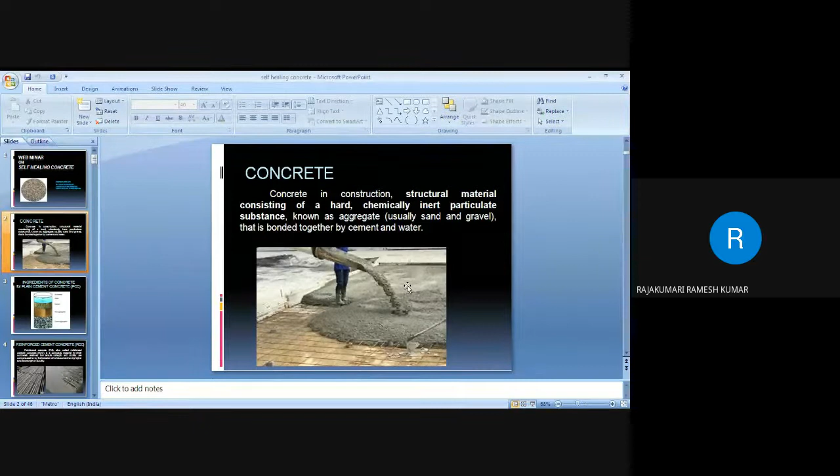Concrete is a hard structural material which is the mixture of aggregates and cement with water. When we say aggregate, the aggregates are sand and gravel. Usually the aggregates are fine aggregate and coarse aggregate. For fine aggregate, we use sand. For coarse aggregate, we add gravel, that is, what we locally call jalli. These ingredients are mixed together, then we get the concrete.

Each one of these ingredients has specific functions, and we need to know how they play in the concrete. First, the coarse aggregate. The coarse aggregate is nothing but the jalli, otherwise gravel. We call it coarse aggregate because the particles are more than 4.75 mm in size. If the particle size is less than 4.75 mm, it is not coarse aggregate; it will be fine aggregate.

Usually we use granite stones. The function of the coarse aggregate is giving the entire mass to the concrete. The entire mass is achieved by the coarse aggregate only. Next is fine aggregate. Fine aggregate is aggregate with particle sizes less than 4.75 mm. Usually we use sand. Sand is a very good fine aggregate material in concrete.

The function of the fine aggregate is to fill the gaps in between the coarse aggregate. If we place the coarse aggregate, there will be voids, holes in between the particles. In order to fill those gaps, we need some material finer than the coarse aggregate, so we use sand as a filler material. So the coarse aggregate is the base material giving the entire mass, and the fine aggregate fills the gaps in between.

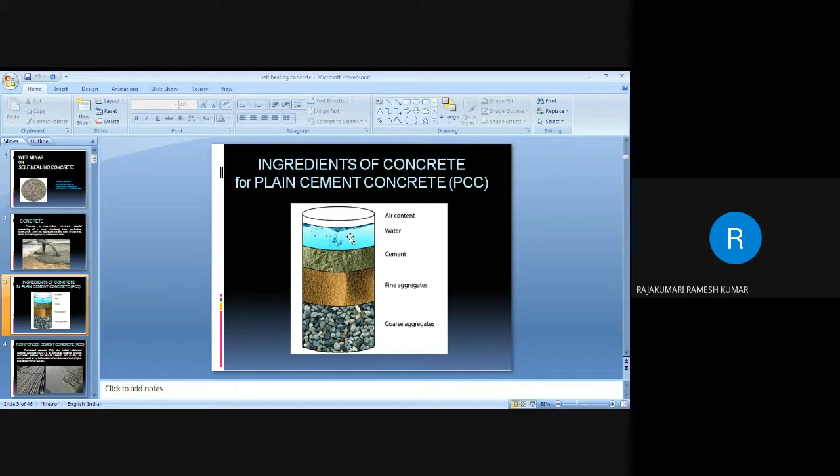So the concrete has very good compressive strength, but the tensile strength of the concrete is very less. But in a structure we need both strengths, compressive strength as well as tensile strength. So in order to increase the tensile strength of the concrete, we introduce steel into it, in the form of steel rods. When we introduce steel into the plain cement concrete, the concrete becomes reinforced cement concrete. We are giving reinforcement in the form of steel rods in order to increase the tensile strength.

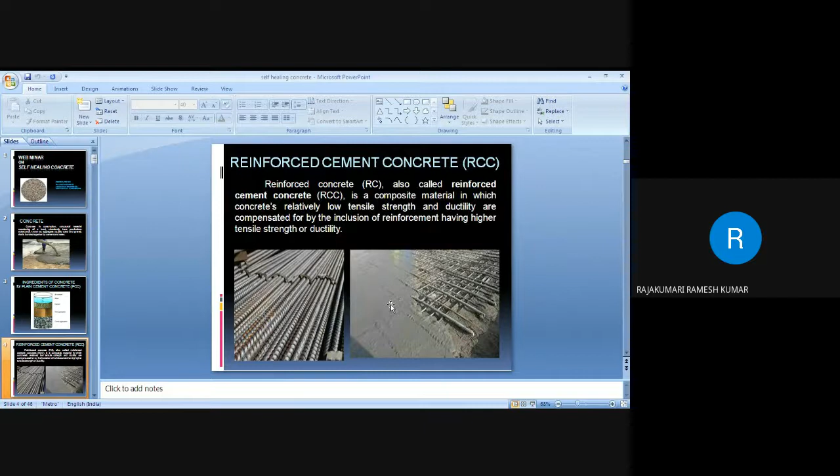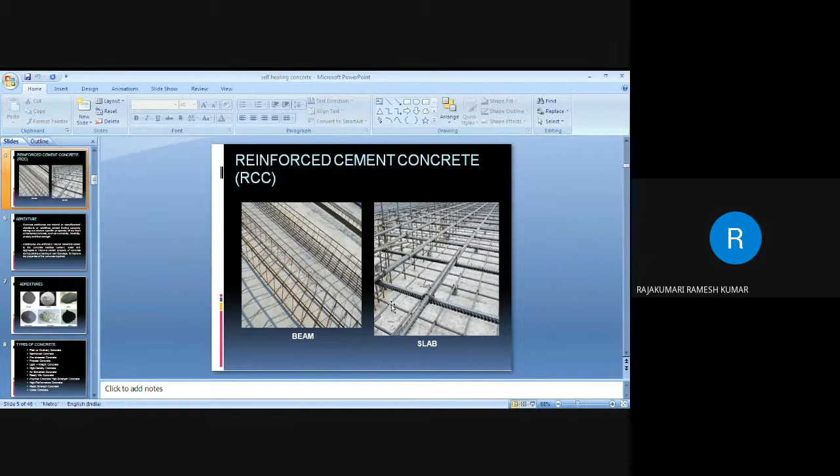So the concrete becomes reinforced cement concrete when it is added with steel rods. This is the steel reinforcement, this is the steel rod, and this is how the concrete is placed over the steel rods. Next, these are the reinforcement details, how the steel bars are bound before laying the concrete and placing it into the element. This is for a beam and this one is for a slab.

Next is the admixture. What is an admixture? We have seen the ingredients of concrete are aggregate, cement, and water. Other than these four major ingredients, if you are adding anything extra, maybe in liquid form or powder form, that is called an admixture. Admixture is a very important, unavoidable element, because in all circumstances we cannot apply either PCC or RCC, plain cement concrete or reinforced cement concrete. We need some special categories of concrete in some places.

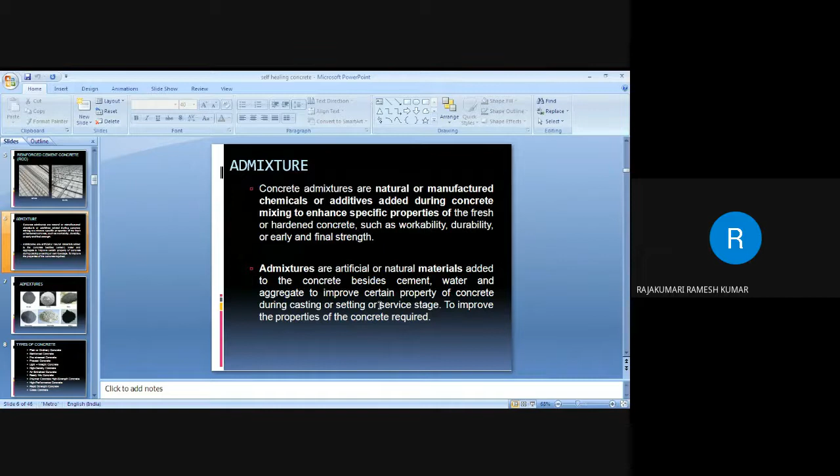We are building bridges over coastal areas, over the seas, over the oceans, or we are planning very high-rise buildings. In those places we cannot have normal strength. PCC and RCC give only normal strength; we cannot get more strength. So in those places we need some more materials to improve the properties, the character of concrete, so we add admixtures into the concrete. Admixtures are any material other than the major ingredients of concrete. Why do we add admixtures? In order to increase the durability of concrete, the lifetime of the concrete, and the strength of the concrete.

So these are some of the admixtures. These admixtures are in powder form. One is fly ash. Fly ash is nothing but the ash derived from coal; when we burn coal, we get fly ash. Next, GGBS, which is ground granulated blast furnace slag. This is derived from steel; the waste produced in the steel process is called GGBS. Next is RHA, which is nothing but rice husk ash. This is derived from the burning of rice husk, so that is called rice husk ash.

Next is silica fume, next metakaolin, and these are all certain types of admixtures, normally used admixtures. Next is types of concrete. As we have seen earlier, the ordinary concrete or plain concrete is the concrete which has only the major elements, that is cement, aggregate and water. Concrete which has these materials alone is called ordinary concrete.

When we introduce steel reinforcement into it, the concrete is called reinforced cement concrete. Like that, we have so many varieties of concrete. Those are pre-stressed concrete and precast concrete. Precast concrete is nothing but priorly built-up elements, like ready-made walls, ready-made beams, ready-made roofs; everything we can get ready-made.

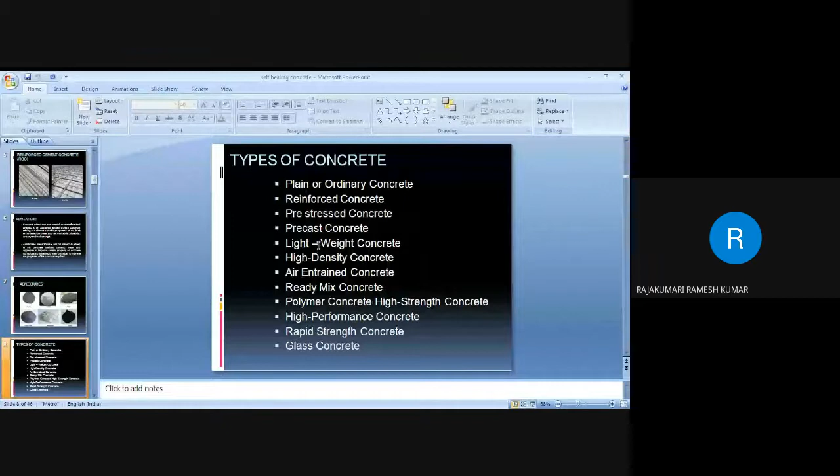Like that, there are various types of concrete. One of them is self-healing concrete. Before that, one of the major issues in concrete is cracks. What is a crack? A crack is nothing but an incomplete division of the concrete surface. It will divide the surface into two or more parts. That incomplete separation of a concrete or masonry surface is called a crack.

So what are the reasons for cracks? Cracks form due to various reasons, like shrinkage. Shrinkage is related to moisture; shrinkage cracks occur due to changes in moisture. If the concrete absorbs moisture, it will expand. If the moisture dries, it will shrink. Due to this, cracks form, and those are called shrinkage cracks.

Like that, due to temperature change: every concrete structure is in direct contact with the atmospheric temperature. When rain comes or hot climate is there, all the weather conditions are exposed on the concrete surface. If cracks form due to those changes in weather condition, that is due to temperature changes.

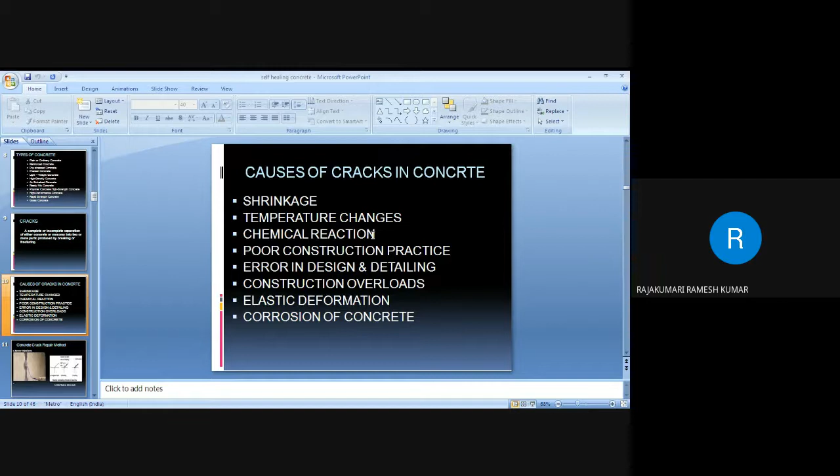Some of the older techniques to repair cracks are epoxy injections. Epoxy is a special resin-based material, and it is injected into the crack. This is one of the older methods. Another method is routing and sealing.

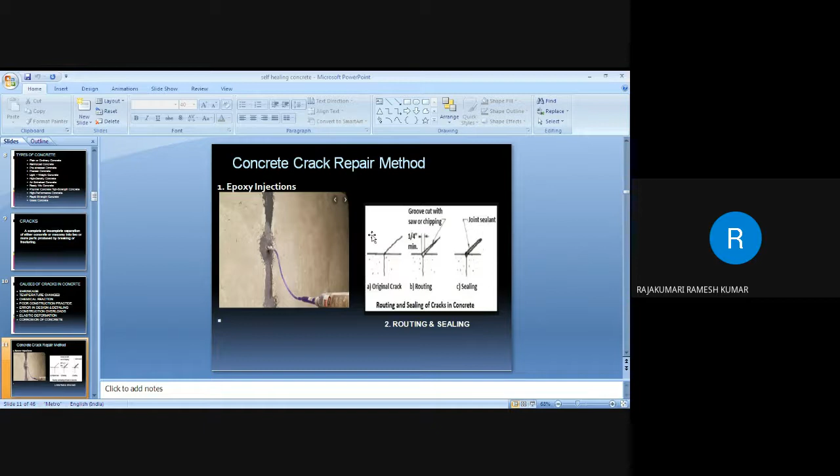In routing and sealing method, the V cut groove is cut along the crack, and it is sealed with fresh concrete. Okay, that is routing and sealing. Then another two methods are stitching and drilling method. In stitching method, the steel rods are inserted into the place where the cracks are formed, and finally it is sealed with the cement paste or any special paste.

Then drilling and plugging: here also small holes are drilled along the cracks where it is cracked. Through those holes, the grouting material, that concrete material, with dry or wet condition based on the environment, is injected through a grout. So this is called drilling and plugging method.

So these are the olden techniques, the existing techniques which are used to repair the cracks on the structures. But though we have varieties of methods to repair the cracks, these methods are very difficult in case of huge structures like bridges, dams, or high-rise buildings. In those places, doing the stitching method or drilling method or any epoxy injection method is very difficult.

So what researchers thought is, without following these techniques, how can we close the cracks, how can we seal the cracks? So they found a solution that is called self-healing concrete or bacterial concrete or biological concrete. All are the same. What is self-healing concrete? Here, the concrete itself heals the cracks. How is it possible?

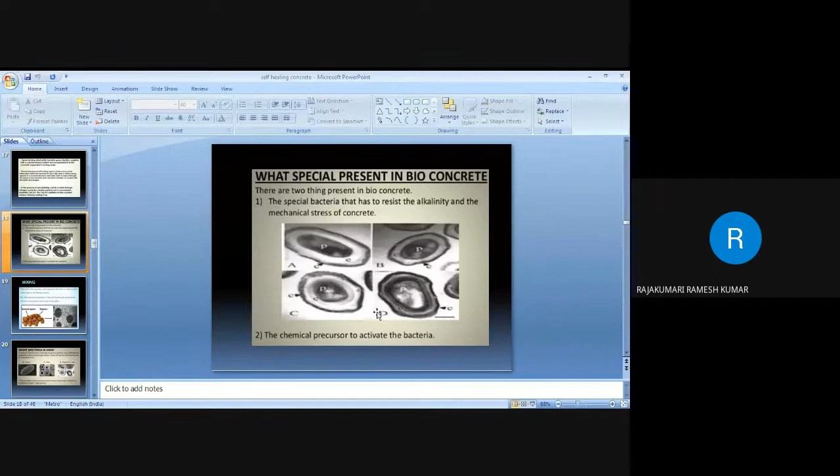Okay, so these ingredients are combined, and it is formed as pellets. And these pellets are going to be added to the concrete. Or sometimes it may be in the form of capsules. These bacteria and these nutrients are all filled in the capsule form.

Next, how this bacteria and the nutrients are mixed with the concrete. This is a very normal procedure, how the plain cement concrete is mixed. How we mix the plain cement concrete: first we add the fine and coarse aggregate, then the cement is added into that, and finally the water is mixed.

Here, after adding the aggregates and the cement, before adding the water, we add these capsules or these pellets. The pellets or capsules are nothing but the combination of bacteria as well as the nutrients. So these are added before adding the water, and finally we can add the water and get the self-healing concrete.

So while mixing this self-healing concrete, we should take care that the bacteria and cement are not directly mixed. Once the cement is mixed with the aggregates thoroughly, then only we should add the pellets. Otherwise the bacteria will start to react with the cement, so the entire step will collapse. So whenever we are preparing the self-healing concrete, the bacteria should not be mixed directly with the cement.

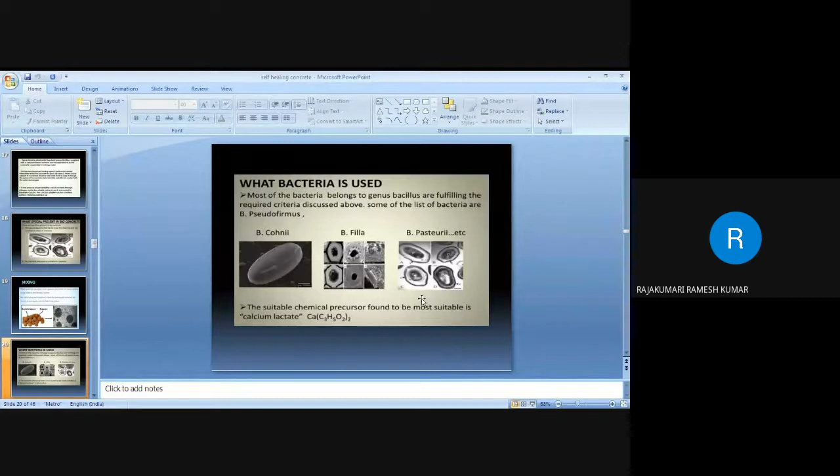So what kind of bacteria are used in self-healing concrete? Normally the bacteria used are the Bacillus type and the Pseudofirmus family of bacteria, in the form of Cohnii, Filla, and Pasteurii. These are the commonly used bacteria in self-healing concrete. And the chemical precursor, as I said earlier, the mineral or nutrient for the bacteria, is calcium lactate. These are the pictures of each bacteria, that is Cohnii and Pasteurii, then Species and Subtilis. These are the commonly used bacteria in self-healing concrete.

Next is the chemical reaction, how the bacteria is activated in the concrete. The activated precursor induces the bacteria to react with the nutrients, forming calcium carbonate, which is nothing but limestone. So this is the chemical reaction. CaC6H10O6 is the calcium lactate, which is the precursor. When it reacts with oxygen from the surrounding environment, both react and it is converted into calcium carbonate, that is CaCO3. This calcium carbonate is nothing but limestone.

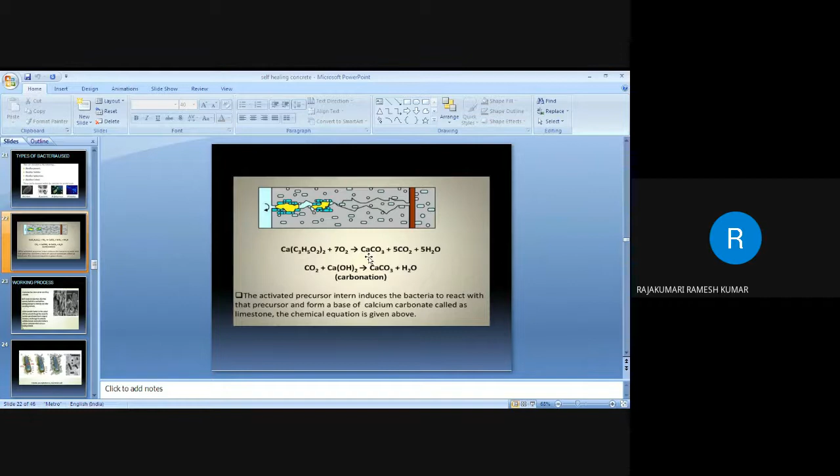So when the bacteria is activated with water or oxygen or carbon dioxide, it will produce calcium carbonate. When it is producing the calcium carbonate, it will be in liquid form. Once the calcium carbonate is formed, it will be solidified. When it is solidified, it will become limestone, it will dry, and it will close the surface.

So in this bioconcrete, if water comes in contact with the concrete through the cracks, then the bacteria get activated from the stage of dormancy. Until the water enters the concrete, the bacteria will be in the stage of dormancy without doing anything.

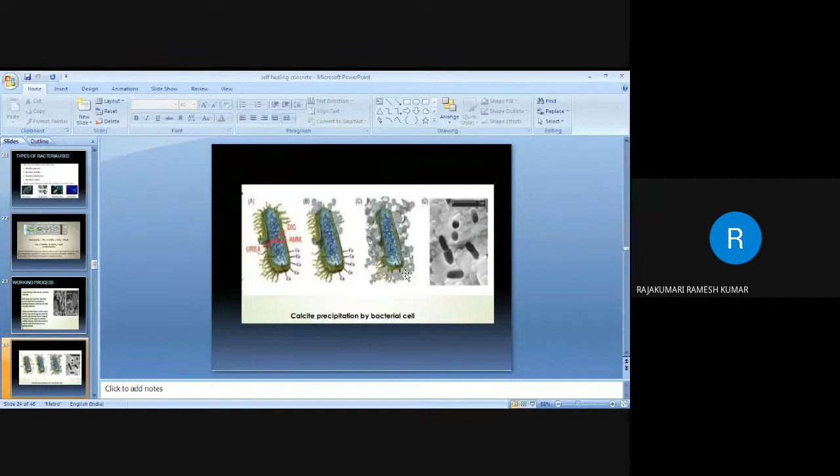It will not be doing anything till the water comes inside the concrete through the cracks. Once the water gets into the crack, the bacteria will start to activate, and it will do some metabolic activities, and it forms the calcite, which is further converted as calcium carbonate. So this is the bacteria having the calcite precipitation after its activation. After it is activated, the calcium precipitate will be formed like this.

Next is how the self-healing concrete is working. The self-healing concrete is a biological one. It produces limestone, and due to this limestone, the cracks will be healed. The chemical reaction will be like this. Special types of bacteria, that is bacillus or pseudomonas bacteria, along with a calcium-based nutrient known as calcium lactate, and nitrogen and phosphorus, are added to the ingredients of the concrete when it is being mixed.

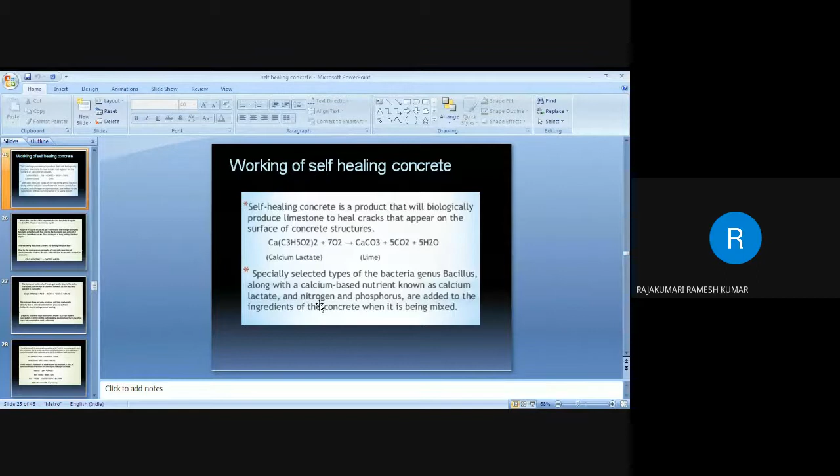So this is not a single-stage curing method. In future, however many times the crack will appear, whenever the crack appears, the bacteria will do the same thing. So it is a lifetime action, not only a single stage.

Next, this is also the same reaction. This is in detail how the chemical reaction will take place between the bacteria and the nutrients. First the calcium lactate reacts with the water. The reaction will take place like this. Finally it will be converted to calcium carbonate, that is nothing but limestone. This limestone is going to heal the concrete or seal up the concrete.

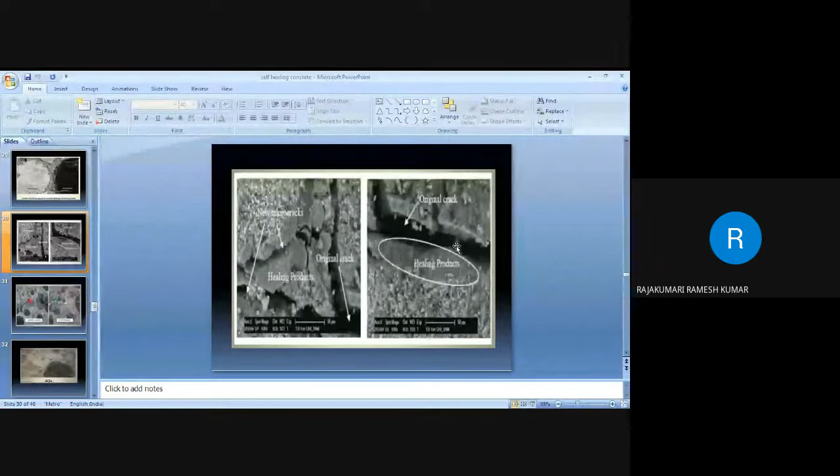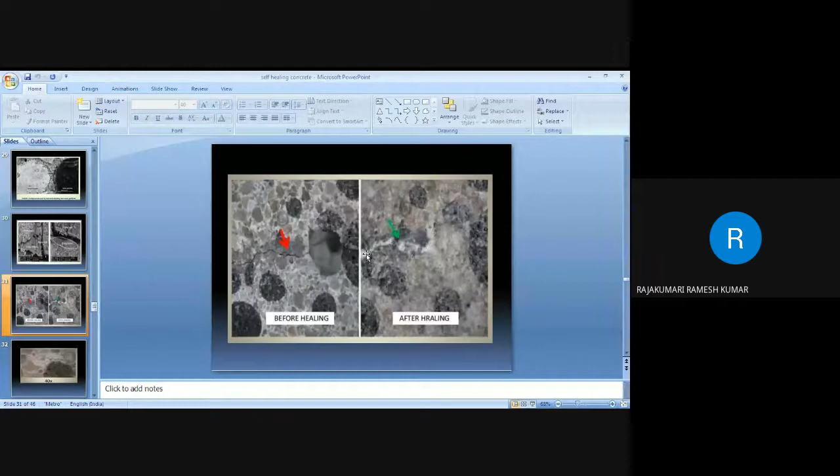This is how the precipitation is formed between the sand particles. This is the calcite, that is limestone, in the form of gel, and here the cracks are sealed like this. Before healing the cracks will be like this, and after healing the limestone precipitation is formed like this. Due to this limestone precipitation, when it is dried, the cracks will be closed. This is the picture as seen in a microscope.

Then how are the precursor and the bacteria applied on the concrete? By two methods we can apply the agents. One is the direct application method, in which the bacteria and chemical precursor are directly added into the concrete, without any form of capsules or pellets. The next method is the encapsulation method, in which the bacteria and precursor are filled in capsule-like pellets, and these pellets are mixed with the concrete.

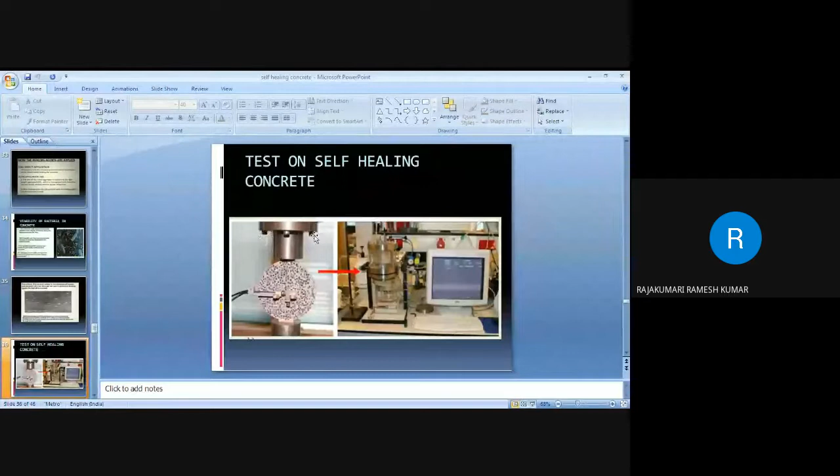Let us see the advantages of biological concrete. As we saw, biological concrete fills the cracks once they are formed. It does not do the process only a single time; it will do the process for the entire life of the concrete, up to 200 years. It will start the process once the crack is formed, and like that we can fill all the cracks in the concrete surface.

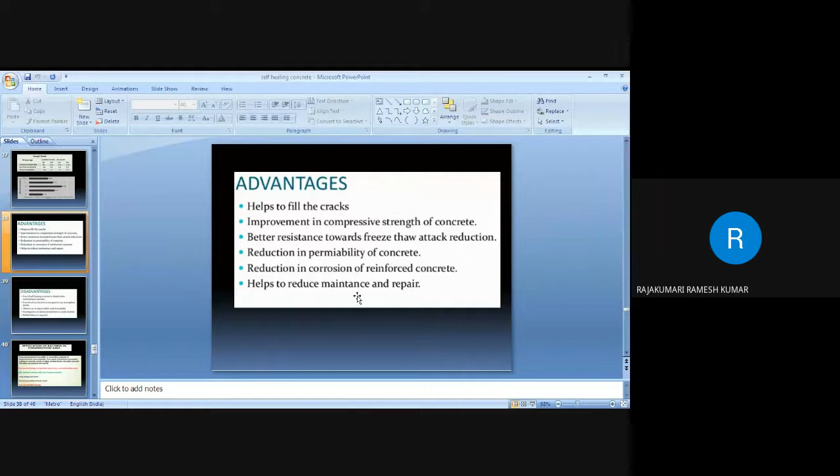Next, we can reduce the maintenance works. In normal, conventional concrete, we give routine supervision. We have to monitor frequently where the cracks take place. But in case of self-healing concrete, we don't do like that, because the cracks are arrested by the concrete itself. We don't need any maintenance or repair work, so we can reduce the manpower and save time. So these are the advantages of self-healing concrete.

Next, self-healing concrete has some disadvantages also. The cost of self-healing concrete is almost double that of conventional concrete, because of using the bacteria and the nutrients needed for the bacteria. The next disadvantage is the growth of bacteria; any bacterial growth is not advisable. That is also a disadvantage.

Next, the mix design of this particular concrete is not available in any code, even the British code or Indian code. Universally, no codes have a proper mix design for self-healing concrete. Along with that, only skilled labor is required, only researchers who have biological ideas. Those labors only we can adopt in self-healing concrete. So these are the disadvantages.

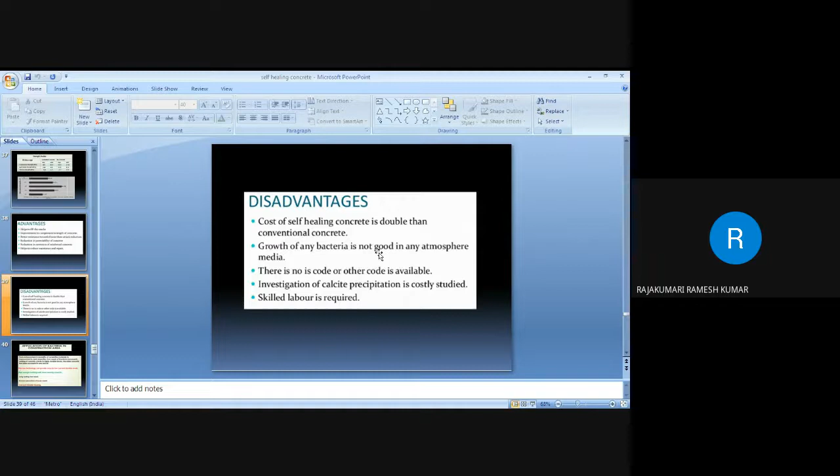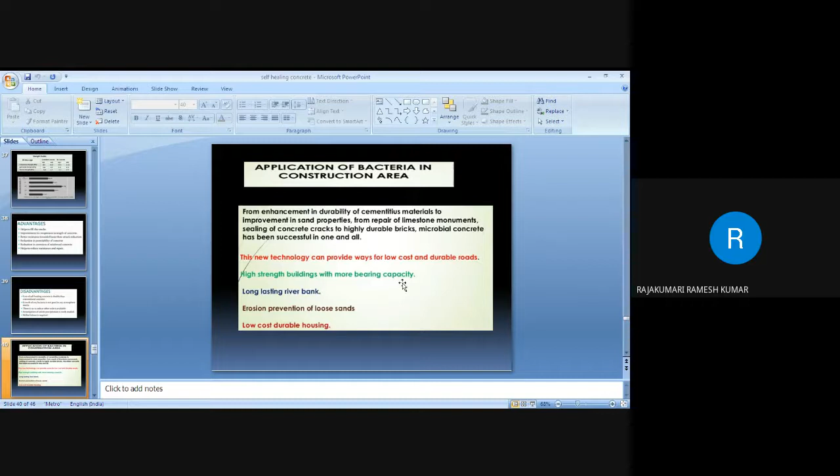Next, the applications where self-healing concrete can be applied. It can be applied to road surfaces, river banks, embankments which have loose sands, and low cost housing. Especially, self-healing concrete can be adopted in highway bridges, tunnel structures, concrete floors, and marine structures.

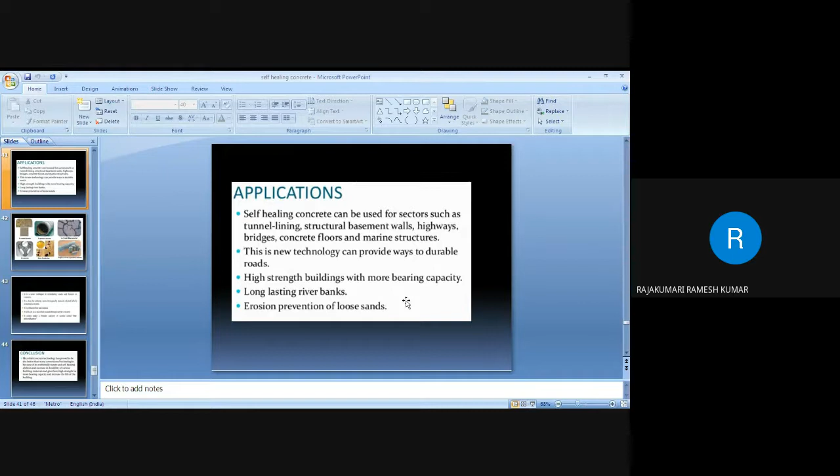Not only concrete, it can be applied in cement mortar for plastering the surface of dams or bridge-like structures. It can be used in precast concrete also. And since it is a crack filling material, it can be used in brick production and pervious concretes.

Finally, it is a very good technique for remediating cracks and fissures in concrete surfaces. It is done by microbiological action, that is, calcium carbonate: the bacteria form calcium carbonate in normal concrete. So it is a pollution free and natural material. These are the highlights of self-healing concrete.

Finally, microbial concrete has proved to be better than many conventional technologies because of its eco-friendly nature and self-healing abilities, increasing the durability of various building materials, giving them high strength for more bearing capacity, and increasing the life of the building. So that's all.

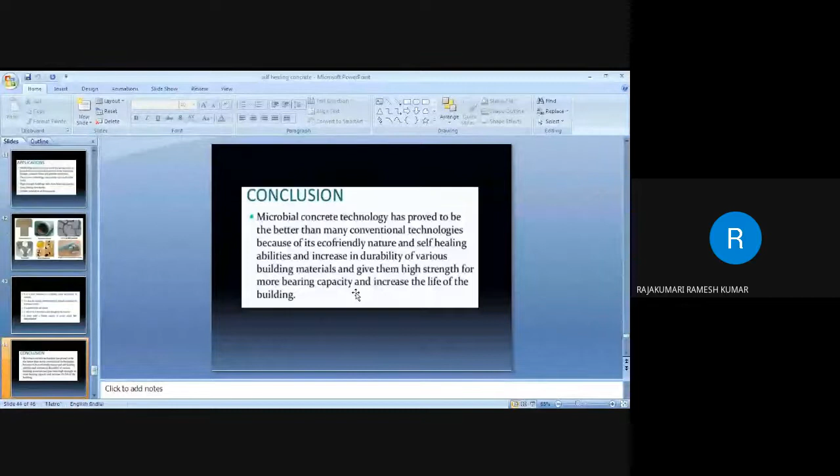So, any doubts on that?